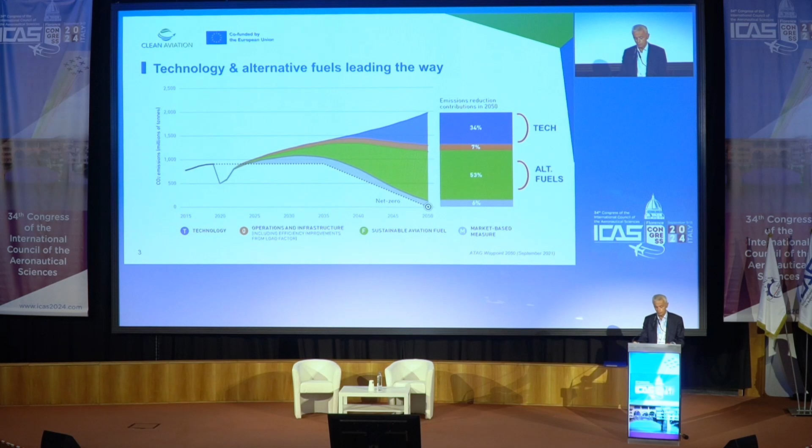I mean, trade-offs, you just fly around those super saturated areas, no contrails, but you add, obviously, because the distance is longer, you add fuel burn, and by that you add CO2. So latest numbers, I don't know, even 80% of contrail avoidance would lead to 6 to 8% additional CO2. So is it worthwhile doing that? Potentially, but we would need to know that contrails are responsible for so much.

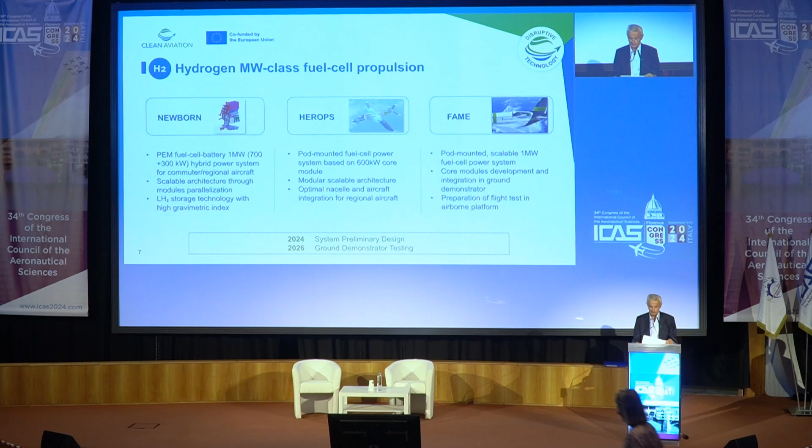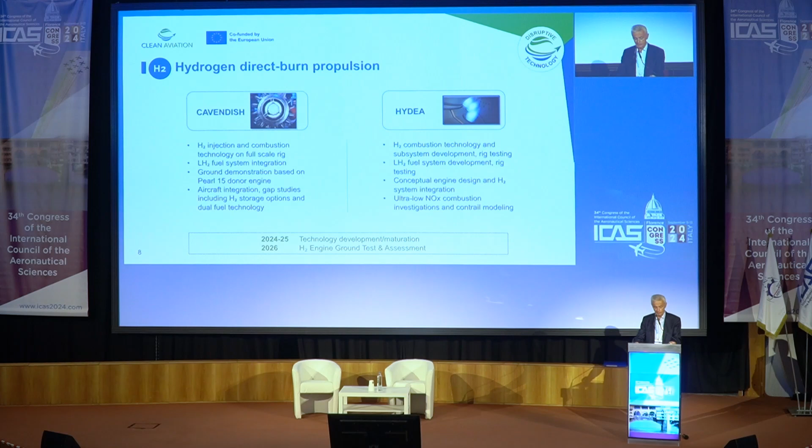I'm going even faster. I'm getting signals from Rich here.

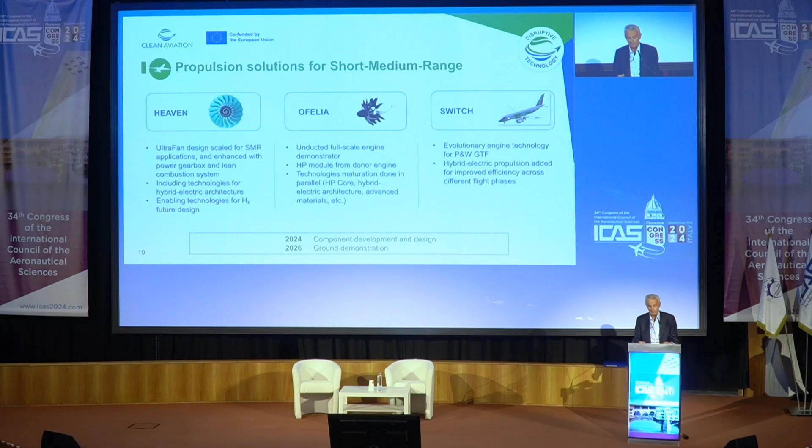In the middle, totally new architecture, so unducted. That technology development has started already in Europe under the Clean Sky 2 program about 15 years ago. We are now hopefully finishing it up to a TRL6, including flight test. And the ambition here is to go from a bypass ratio of the comparable state-of-the-art engine of today, the LEAP has a bypass ratio of 10 roughly. This OFELIA, or RISE as the product name is, so OFELIA is the technology which is leading finally to the product, is targeting a bypass ratio of 75. So also a totally different ballpark, leading to 20% at least in terms of efficiency.

Coming more to the aerodynamic side here, 3 wing projects, UpWing, AWATAR, and HERWINGT, all high aspect ratio wings, 15 in comparison to roughly 10 today. And you see here the block fuel advantages, one being pursued very much on the left-hand side in the UK program, Wing of Tomorrow. Going to mention that again in a minute.

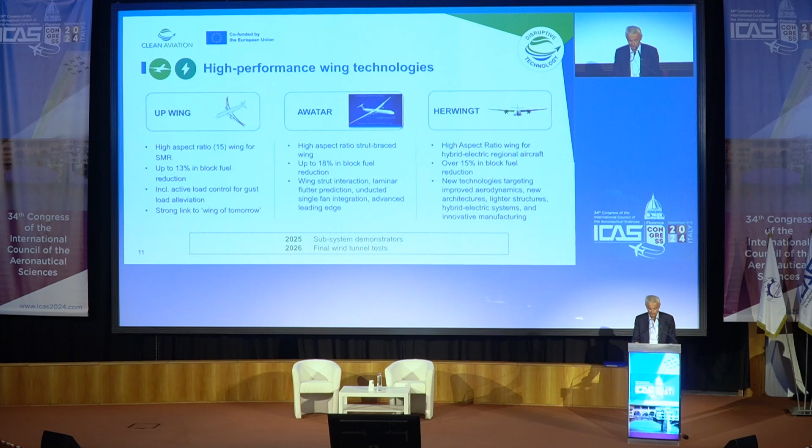Now, coming to a few examples on the country side. As I mentioned before, countries in Europe have their own technology programs. In France, a very, very important one led by DGAC under the strategic initiative CORAC, providing as well bricks to the RISE program, but also working on H2 hybrid electric architectures. Very, very complementary to what we do at Clean Aviation, but it requires, again, quite some effort to bring those efforts into alignment.

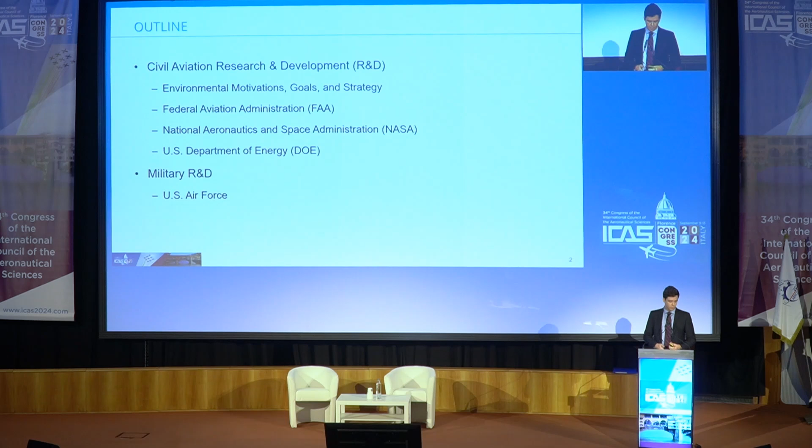So I'll present sort of the civil aviation research and development perspective, starting with our environmental motivations, goals, and strategy, then end up covering some of the agency activities. I'm coming from the FAA perspective, so I'll cover our projects and programs. I'll summarize the work at NASA Aeronautics and touch briefly on the role of the U.S. Department of Energy in this picture as well, before Mr. Guerrero covers the Department of Defense perspective.

So the U.S. Civil Aviation Sustainability Strategy really tries to target all of the environmental impacts of aviation. So emissions, those that have a local air quality and health impact, as well as those with a broader climate impact, feeding into the atmospheric chemistry and physics, greenhouse gas emissions, CO2 emissions, of course, as well as the non-CO2 impacts of aviation. And we try to take really a life cycle perspective as we do this.

You'll see in some of the coming slides, we have a lot of focus on the life cycle emissions of the energy sources we're using in aircraft, with currently a lot of investment in the sustainable aviation fuel space. Drop-in jet fuels with 50% or greater reduction in life cycle emissions compared to conventional petroleum jet fuels.

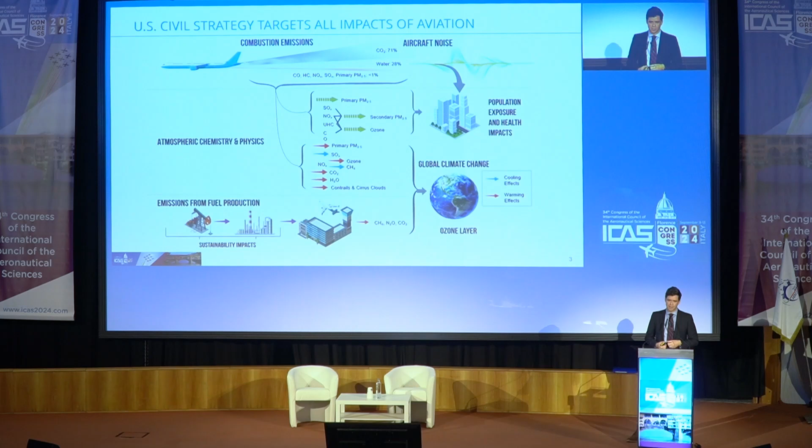And we also put a large emphasis on noise as well. Axel touched on interdependencies of different environmental impacts as you design an aircraft and an engine, and this is an important one to us as well, as we try to mitigate the impacts of noise on communities around airports particularly.

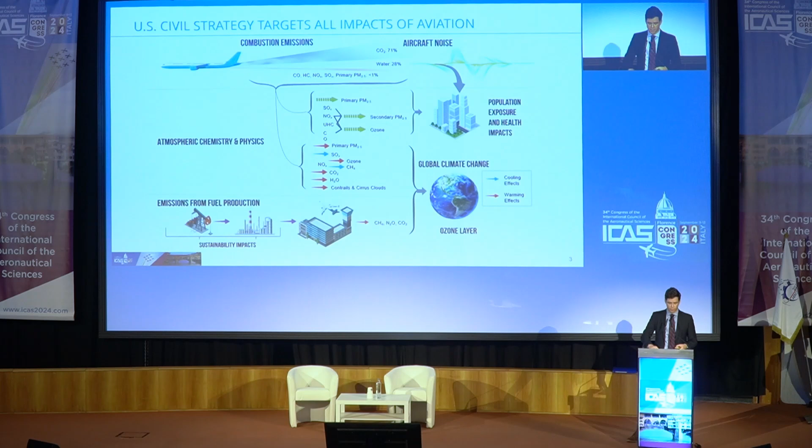So this is a national strategy. We have a set of policy and strategy documents that contain our priorities, goals, and roadmaps to those goals. At the highest level, there's a National Aeronautics Science and Technologies Priorities document that comes from the White House, and one of those priorities is the sustainability of aviation. We also have a U.S. National Transportation Decarbonization Roadmap across different modes of transport, and then specifically for aviation, we have the U.S. Aviation Climate Action Plan, which sets a goal of net zero greenhouse gas emissions from the sector by 2050.

That lays out action in areas of aircraft technology, research and development and deployment, operational concept development for efficiency, as well as sustainable aviation fuels. And you'll see the sustainable aviation fuels actions are further detailed in a SAF Grand Challenge roadmap across the government, and we also have a U.S. National Clean Hydrogen roadmap and strategy.

So how do we look at this? As we see the path to civil aviation sustainability, we're thinking of this as a long game; it's useful to think of this in terms of eras. Of course, we have our net zero goal for greenhouse gas emissions in 2050 and need to accelerate towards that in the coming decades, while also understanding and reducing further the non-CO2 impacts of aviation.

So our first era is one of evolution. We still see the persistence of tube and wing aircraft using existing infrastructure, but transitioning to drop-in sustainable aviation fuels, increasing electrification of the aircraft, and evolutionary gains in efficiency to reduce emissions and noise. This may not be the most glamorous from an R&D perspective, but it's nonetheless very important because these gains early have a compounding effect, especially given some of the historically slow rate of fleet replacement and expansion.

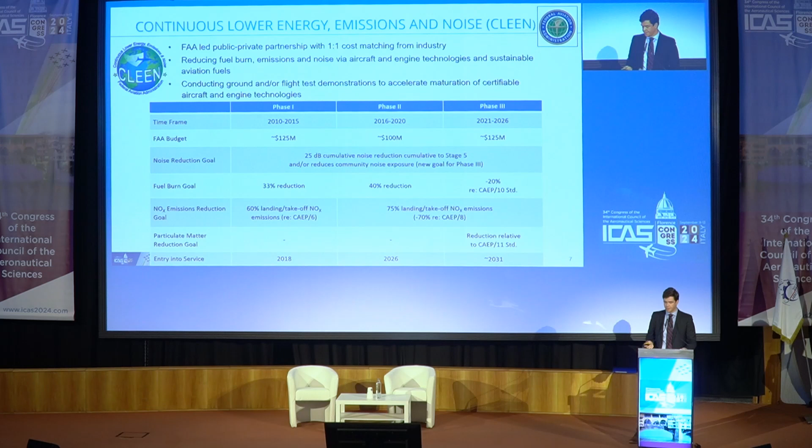So at the end of each 5-year phase of research, the technologies have had the technical risk reduced, the benefits demonstrated, and the industry partners are in a position to take those technologies and integrate them into their next generation aircraft and engine products. So CLEEN's focus is really one of acceleration into deployment and adoption.

Here's our current phase of research. You'll see the aircraft walk-around chart here, work across the propulsion system, the airframe, the aircraft systems, and sustainable aviation fuel work that's supporting particularly testing for qualification and ASTM approval of new SAF fuels. We're working with 8 industry partners right now. You'll see around the different areas of the aircraft, and each of these technology projects here is color-coded by the benefit area they target: fuel efficiency, emissions, and noise.

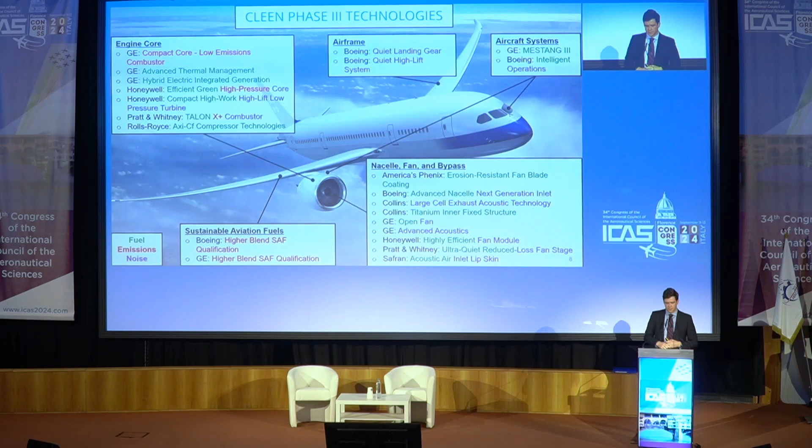So you'll see under CLEEN 3 quite a lot of work in the nacelle, fan, and bypass of the engine, with a focus on ultra-high bypass engines, some of which is very nicely complementary to the Clean Aviation work. We also have work on that side of the Atlantic with GE on the open fan architecture for the RISE. A lot of work in the engine core across efficiency, noise, and emissions. And then on the airframe side, quite a lot of noise focus within the current CLEEN program, quiet landing gear, quiet high lift technologies with Boeing, some electrification of aircraft systems, and some operational opportunities as well.

So CLEEN is the premier industry partnership. This is complemented by our academic research partnerships under ASCENT, the Aviation Sustainability Center of Excellence, focused on applied R&D at any TRL, tackling the same set of goals, working to advance the state of the art of knowledge across the industry more broadly with publishable results on individual technologies, but also enhanced analysis and design tools and test capabilities.

And most recently, we've expanded our portfolio with the new FAST program, Fueling Aviation Sustainable Transition, with greater government-side cost share, a focus specifically on fuel efficiency and greenhouse gas emissions reduction, and unique within our portfolio of research, across a broad set of awards. This also includes some work towards electric, hybrid, and hydrogen fuel cell regional aircraft concepts.

Also very important to the U.S. civil aviation sustainability strategy is sustainable aviation fuels, or SAF. The SAF Grand Challenge was launched as a multi-agency effort to work towards really ambitious goals. 3 billion gallons of U.S. domestic SAF production by 2030, and putting us on a trajectory for 35 billion gallons by 2050 for SAFs with at least a 50% reduction in life cycle greenhouse gas emissions. These various agencies came together to lay out a roadmap of 6 key action areas, and the FAA's role spans four major pieces of these.

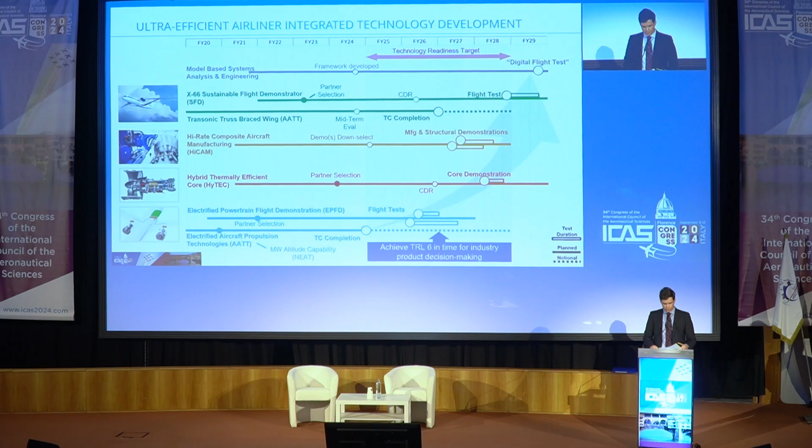So all of this work on the ultra-efficient airliner is then complemented by a set of operational demonstrations. NASA has a primary role in developing these new concepts to optimize flight operations and then transition that research to the FAA for implementation and the operation. So a current operational demonstration focused on pre-departure rerouting, reducing surface delay, thereby reducing fuel burn and emissions, not only for the aircraft being rerouted, but all of the aircraft operating in that environment at that time.

There's 3 follow-on demos, a gate-to-gate trajectory management focus with more of an en route efficiency focus, work towards improving recovery from irregular operations, and then culminating in a capstone demo that's full 4D trajectory optimization end-to-end with data sharing and collaboration amongst airspace users. So as I mentioned, once mature, these technologies and concepts transition to the FAA for implementation. So we continue to work hand in hand throughout all this.

And lastly, before I wrap up, I did want to touch on the increasing and significant work around non-CO2 impacts of aviation, including contrails. And just last year, NASA flew their DC-8 aircraft behind a Boeing 737 MAX with LEAP-1B engines to sample emissions and look at how changes in fuel composition can affect emissions and can affect contrail formation.

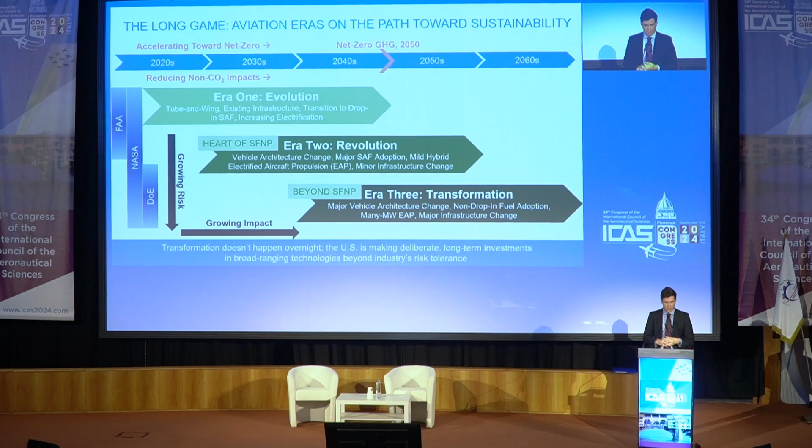And this slide was kind of a different version that shows some of the agency roles there on the left. So you can see FAA takes a focus primarily on evolution while supporting some of the revolutionary work. NASA's SFNP is squarely in that revolutionary space, and NASA's working beyond SFNP into the transformational space, all complemented by some of the work of the U.S. Department of Energy and their Advanced Research Projects Agency for Energy.

So I guess the overall message here is it's a trailer for a lot of the presentations you'll see this week from the NASA projects, as well as from a lot of the FAA CLEEN collaborators. And you see we have simultaneous R&D investments across all of these eras to move us forward. So thank you. And I'll pass things over to Mr. Guerrero.

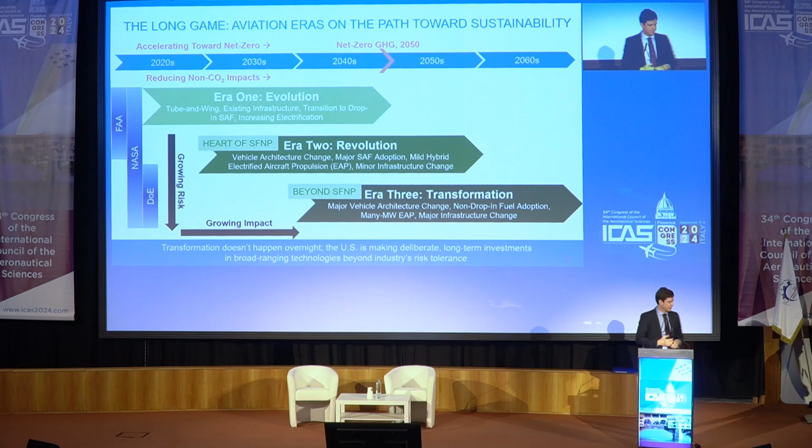All right, green goes forward. So as a former pilot, I think I could figure that out.

So hi, I'm Bert Guerrero. I was an Air Force and Navy pilot for most of my career and then transitioned to this job working in the Pentagon, looking at operational energy, and for us, operational energy is aviation fuel. We burn on the order of $5 to $8 billion of fuel every year.

We have a climate action plan that, I'm not getting any luck here. That's why.

So we burn about $5 to $8 billion of fuel, depending on the price and depending on other things. And so, my job is to determine how do we continue to burn that fuel efficiently so I can spend less on operational costs, get more training, get more capability out of our aircraft. You'll see a lot of my presentation is really about legacy aircraft.

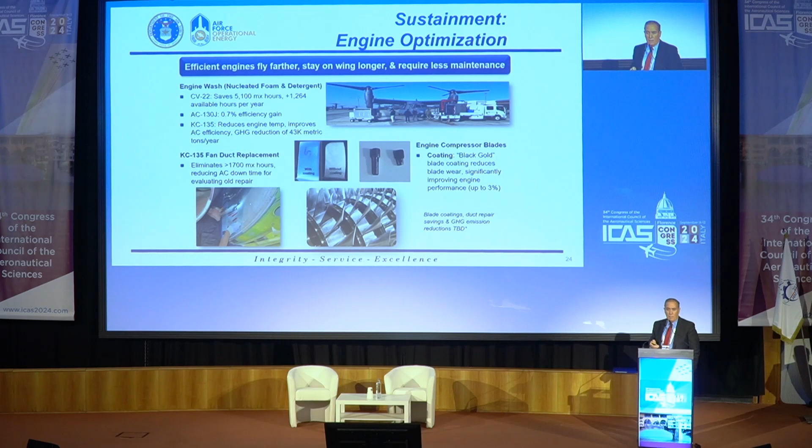And you'll see that the real gains that we're getting were in mission planning, going from a whiteboard with dry erase markers and magnets for a 50 tanker, 250 aircraft schedule to something that actually gets us 3.6% better. And then the next version of that is what do you do when you do AI, ML, and have algorithms that help you optimize, and you can get 10 to 20% better just depending on the scenario. And then this is the kind of savings you start seeing. This is primarily through mission planning tools and just culture change, 70 million. And this is a cost per flying hour change. So we're seeing a pretty big impact dollar figure wise in the Air Force just by being smarter about how we execute the mission.

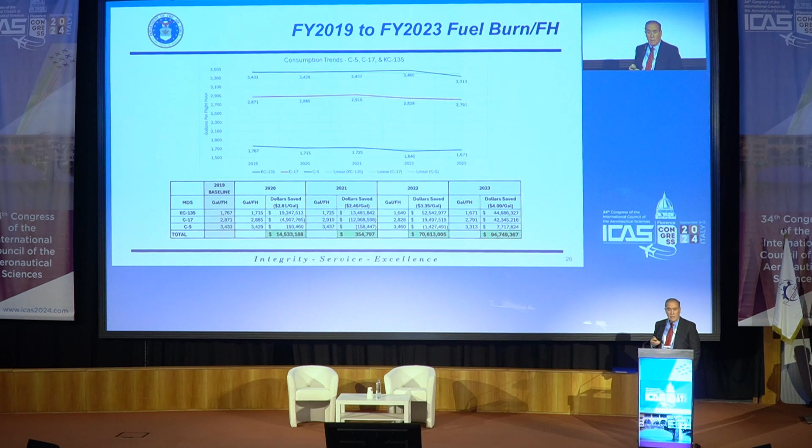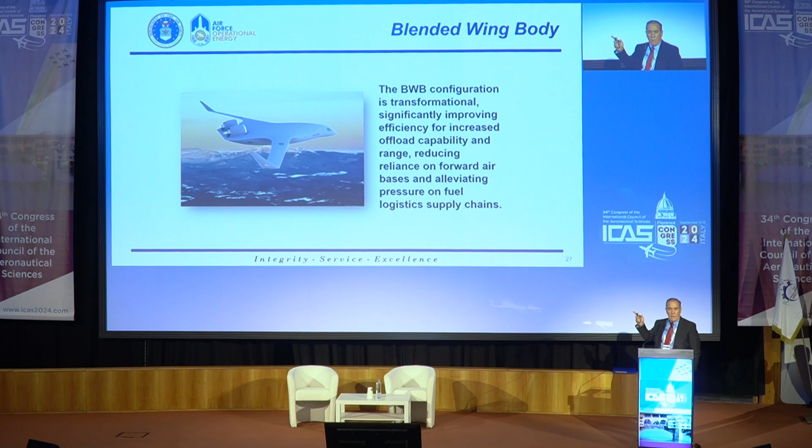And then this is our big idea. My office worked with the Deputy Secretary of Defense to fund this blended wing body program. We plan to fly this thing in 2027 as a demonstrator aircraft with a company called JetZero and Scaled Composites, and you'll be hearing more about that tomorrow. There's a session on it. For us, we think there's value to this public-private partnership. We have an interest in this because this helps us deliver a lot more cargo, a lot more fuel at far distances, and we know the commercial airlines have interest in it because they can deliver passengers with about 30% less fuel.

And this is just kind of a picture of what we think. At 4,000 miles off the coast of Australia, you can refuel 6 F-35s as compared to just one with our KC-46 or KC-135. So it's a big operational benefit for us.

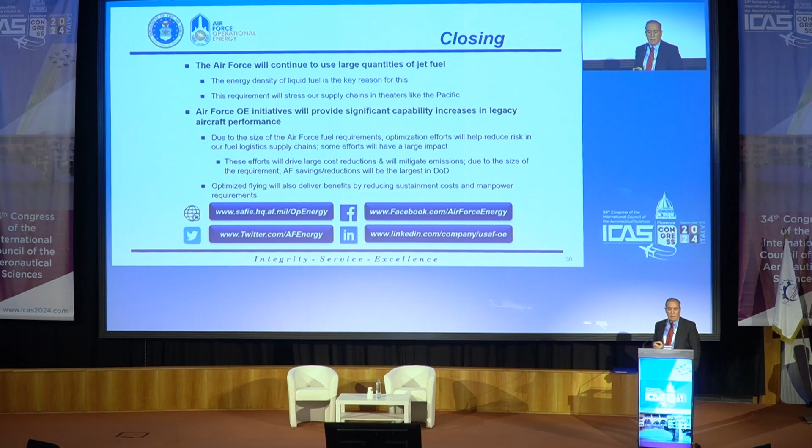And then just finally for us, we're going to burn a lot of fuel. We know we're going to burn a lot of fuel. We're trying to find out ways. We burn more fuel in the Air Force than all the other services combined. So the Army, Navy, Marine Corps, add those all up, those are less than the U.S. Air Force. And that's why the Air Force is taking the lead for the sustainability piece, because we know it's a big dollar figure that we can take advantage of. And that's my presentation.

Okay, so our final presentation will be Guy Norris, who's a senior editor at Aviation Week. You've seen a snapshot of kind of what's going on in the U.S. and in Europe and the UK. This is going to be a look at kind of the Far East, and we really thank Guy for coming here to share his views on this.

Hi, good morning. It's still just good morning, I hope. Well, yeah, as Rich said, this presentation has been put together, really, I suppose, by myself and my colleague Graham Warwick, some of whom you may know. He's the tall, hairy one, and I'm the slightly smaller, less hairy one, just in case there's any complication there.

Anyway, our goal is to basically summarize the main areas of sustainable aviation research and technology across a broad geographic region. As Rich said, obviously you've heard about Europe and North America, but what about Asia and the Asia Pacific? They're playing an increasing role, actually, in the growing push to decarbonize aviation. So our methodology was simple. We developed a sort of an arbitrary taxonomy to classify the major sustainability technology initiatives underway in Europe and North America. And we divided that into 5 main themes. And then we basically looked at comparable programs underway in Australia, China, Japan, South Korea, and New Zealand.

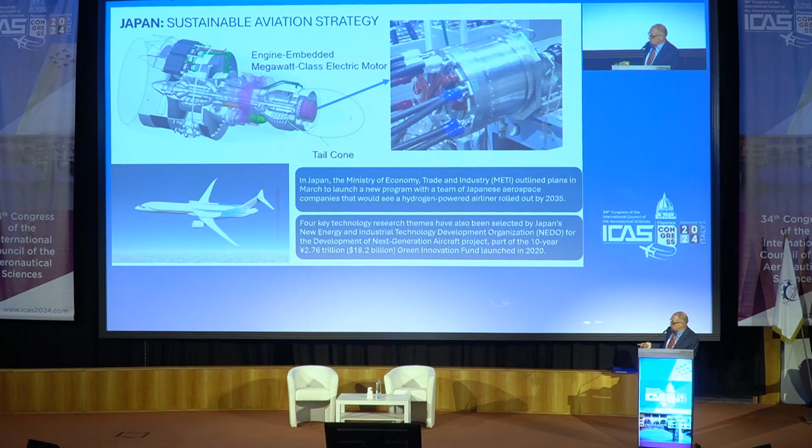So meanwhile, JAXA, a bit like NASA in that respect, has a longer-standing tradition of this research. It's been looking into hydrogen-powered aircraft and advanced propulsion under the Sky Green Plus R&T program. And it has an emissions-free aircraft Sky Frontier project, which targets increased propulsive efficiency through our good old friend the blended wing body, essentially distributed turboelectric propulsion, as well as improved aerodynamic efficiency through boundary layer ingestion.

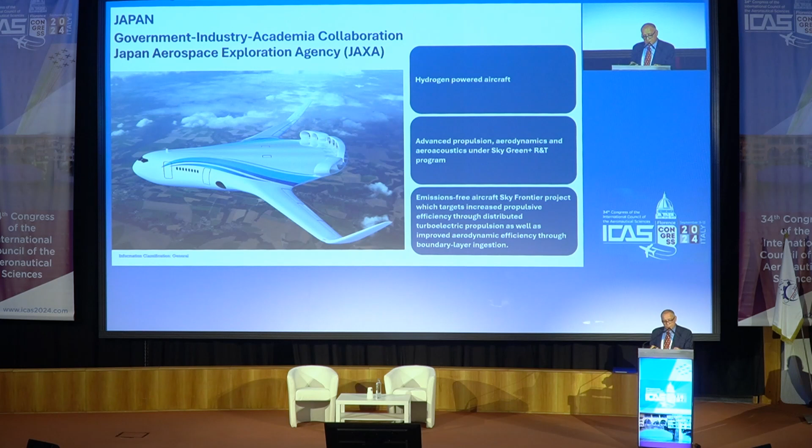JAXA and KHI have launched a 10-year research project to study core technologies for hydrogen-powered aircraft. This three-pronged project covers hydrogen combustion, liquid hydrogen storage tanks, and airframe structures for the hydrogen-powered aircraft. And again, there are several more examples in the paper.

So moving to the next one, Korea. As I mentioned earlier, the K-UAM, Korea Urban Air Mobility Grand Challenge, is the big focus really there, hosted by the Korean Ministry of Land, Infrastructure and Transport.

It's one of the most aggressive government-backed initiatives underway anywhere, as far as we can see, to commercialize UAM. And the Hyundai-led K-UAM One Team has already conducted end-to-end UAM demonstrations at a rural test site in Korea using an uncrewed eVTOL. And so, much more to see in this area.

Moving on to Australia. Again, we're seeing this latest phase of the EATP. There's been 12 projects that are sharing a $13.5 million Australian dollar contract in federal funds. That's the second round they've gone into now. And projects include use of drones for large-scale farm spraying, humanitarian disaster recovery operations, and the delivery of cargo and medical products.

A company called AMSL Aero has also received funding for flight testing and regional demonstration of its Vertiia eVTOL. And that will develop and demonstrate a hydrogen refueling system to enable regional range. So again, it's not on the grand scale that you see in some countries and continents, but it's very, very focused on particular breakthrough areas, and therefore it's definitely worth keeping an eye on.